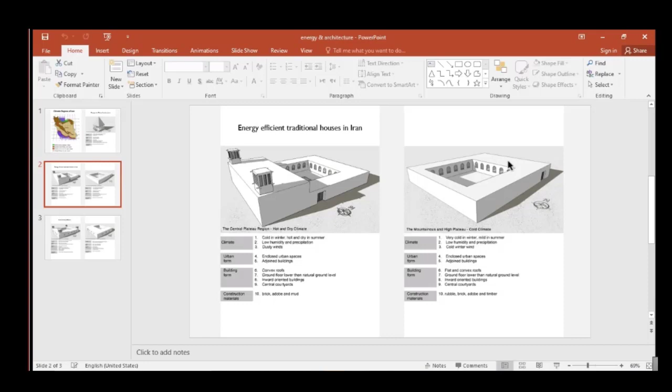this is winter living quarter. Summer living quarter. Summer living quarter is always in shade. Winter living quarter always has access to direct sunlight. Here is warmer in winter. When you go to cold climate, winter living quarter becomes big, summer living quarter becomes small.

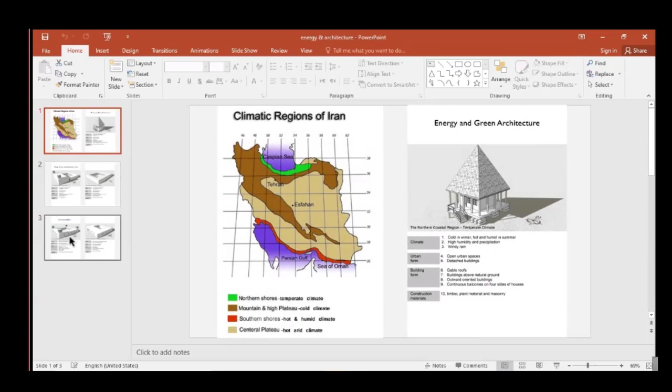When you go to the Persian Gulf and Sea of Oman, hot and humid, you come up with this kind of shape. Cross ventilation becomes important. And in here, which is hot and semi-humid, summer living quarter becomes very important. Winter living quarter is not.

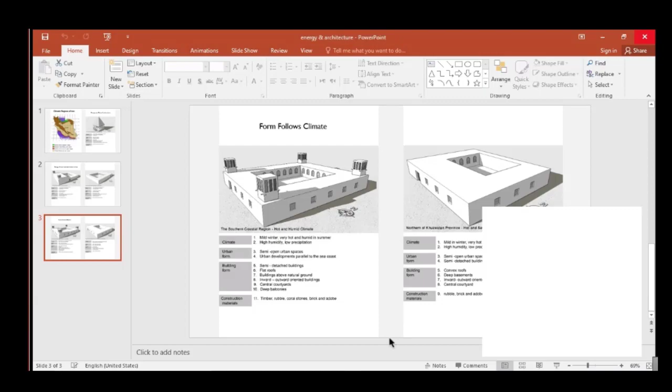So, as a conclusion, what I want to say here is, with minimal resources and material, it would provide support for people to live in. Right now, we have to realize that our planet has limited resources. But they provide protection and comfort for people to live in. Those lessons are for today, for our children in the future.

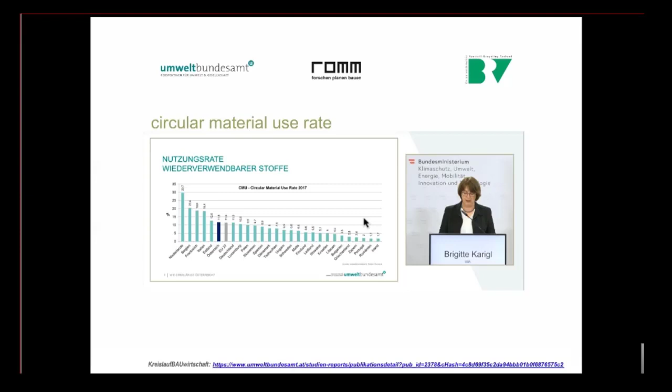So only a small percentage of material is guided in a loop, and this is why we started to look for standards in resource-saving construction, together with the Umweltbundesamt, which is a governmental organization, and the roof organization of building material recycling. And that was before the pandemic came up, at the beginning of February last year, when I presented these figures.

And you have to realize that on the waste side of resources, building construction is responsible for 70% of the waste in Austria. So more than half of all waste is excavation material, which goes to landfill mostly, and still 16% is demolition construction waste. So this enormous amount of more than 30 million tons every year is due to construction.

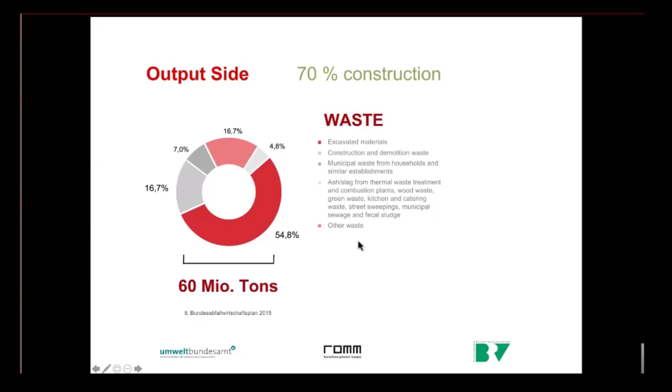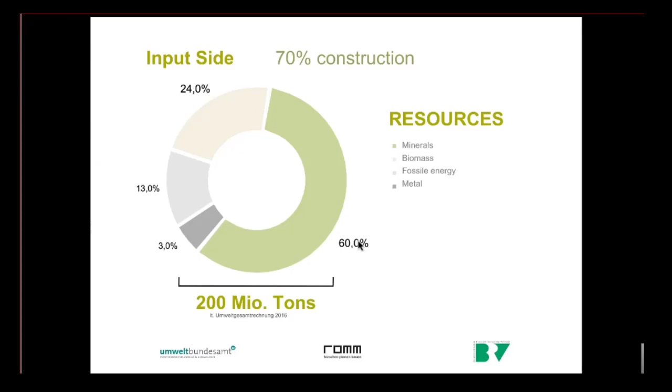But on the resource side, we have an even huger need, because 200 million tons of materials are needed in Austria every year, and again, 70% is needed for construction purposes. So these two figures don't really go together. So even if we close our loops to 100%, we only get 1/3 of the need covered. So 200 million tons are needed and 60 million tons are waste.

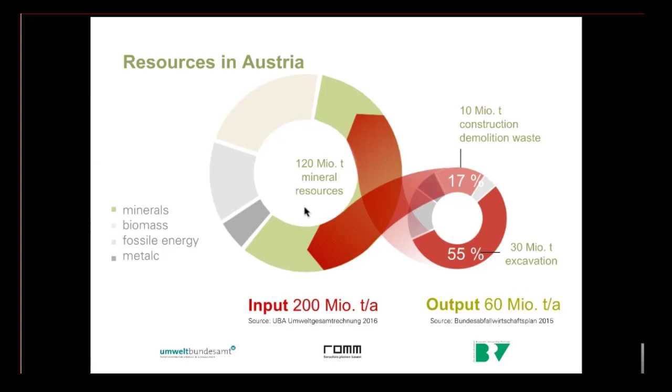And of course, we were looking for a way to bring these two figures together, and the only way for a circular economy in construction is first, of course, to close the loops, but then I agree completely that we have to choose a more durable construction. So it's no more the idea of less is more and being light and so on, but less is more durable. It has 200 years to last. And of course, we have to apply much more renewable resources, as well as renewable energy.

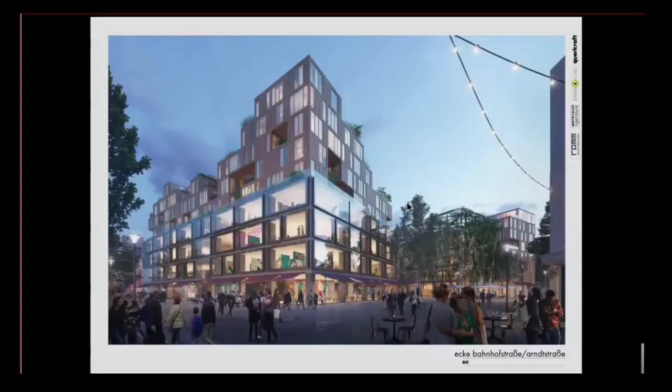So let me give you some examples of our planning practice, where we mostly are consulting other architectural practices all over Europe, and we go through this very quickly, and finally we stay a little longer with the examples of circular construction in terms of construction sites and resource management. So let me show you this competition from last year. It was with Querkraft architects, which are quite famous architects in Vienna and Austria.

And we were invited for an inner city retailer from the 60s, a construction from concrete. And we decided not to tear this existing building down, but to build on top of it and to use the structure. And this was the given existing building, a retail like C&A and Karstadt in Germany.

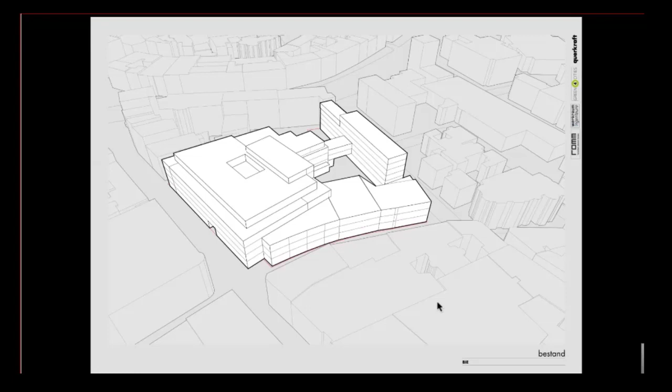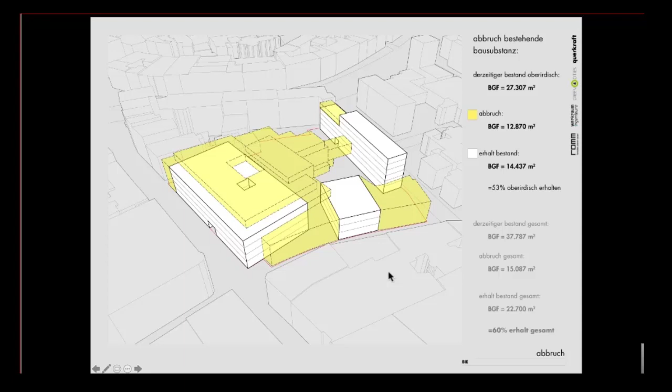This is a site in Bielefeld in northern Germany, where the competition was. And finally, we just took away 40% and we cleared the construction and the structure, and then we decided to keep all the load-bearing structure and to place in new access cores, and finally to put the new architecture as a wooden construction on top of it.

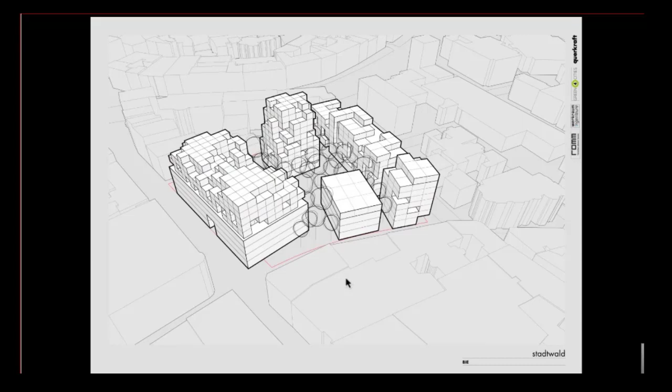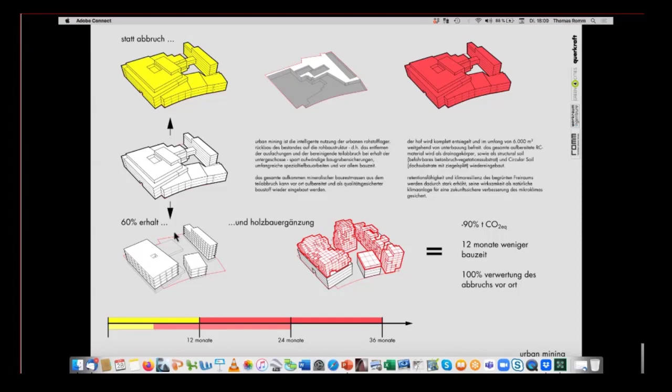So the next step was, of course, to create a climate change adapted structure with much more green on it and in it than it was before. And we did some calculations, and when you compare a demolition and a new building with our procedure, you can save 90% of CO2 emission just by keeping 60% of the structure and by using renewable resources which do not emit any CO2.

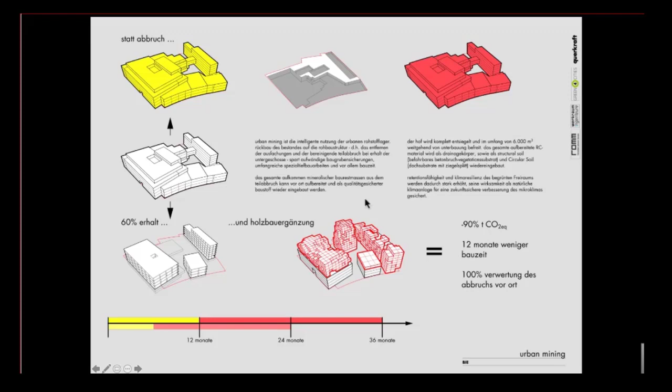And by the way, you are much faster when you choose the second procedure, because the demolition work is much shorter and you build up on a structure which is half given, so even the construction phase is shorter, and this is why it's also an additional advantage. It looks nice.

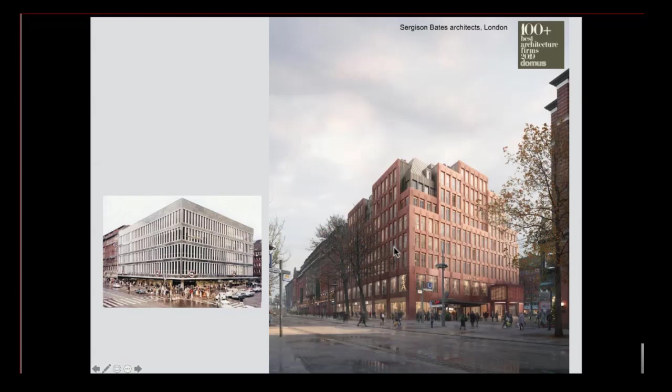Another example, a competition that we have won this year with the London office in London, was also a retail object, an inner city retailer which was built in the 60s, but in that case it was impossible to use the structure because of asbestos, and it was highly contaminated. So we had to choose. We could not use the existing structures, so we were thinking about a low-tech application for a hotel on top

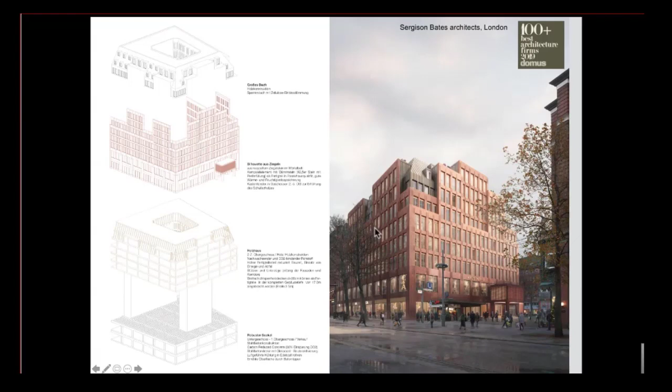of a retail store, and the solution was to choose not an insulated building, but a building completely out of brick, which was cladding a wooden structure like a big ship, a solid construction of wood placed on a base of concrete. So clear separation of materials and resources was the concept, and the cooling and ventilation of the building was meant to be, as you see on the left-hand side, a concrete core cooling system.

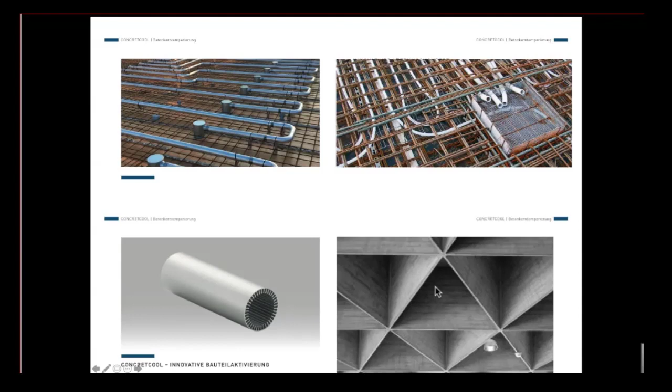So you're cooling the building by its thermal mass and using its construction materials to cool down the ventilation air, which is tempered by the mass of the concrete itself, and that was the idea. And just 1 year before that, in 2019, we could not win this competition, but it was the first one where we used that concept of building thermal mass to heat, to store and to cool energy, and it was a double application in a way.

The submission had to include a version where we kept half of the existing building, which of course we did prefer, and this is the yellow one. So in the direct comparison, the same idea was to use the thermal mass of the concrete construction inside with building component cooling, the activation of the concrete slabs, and to have a monolithic facade which is not insulated but purely made out of brick.

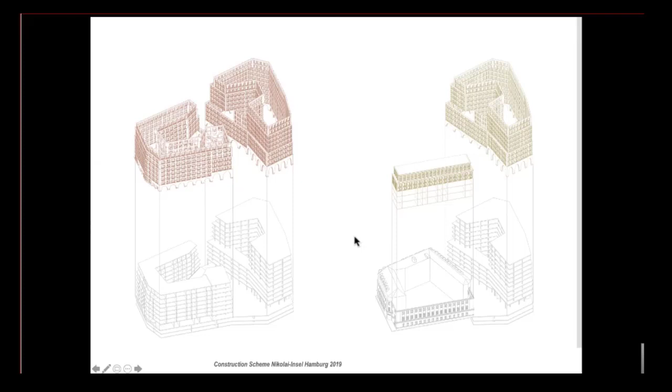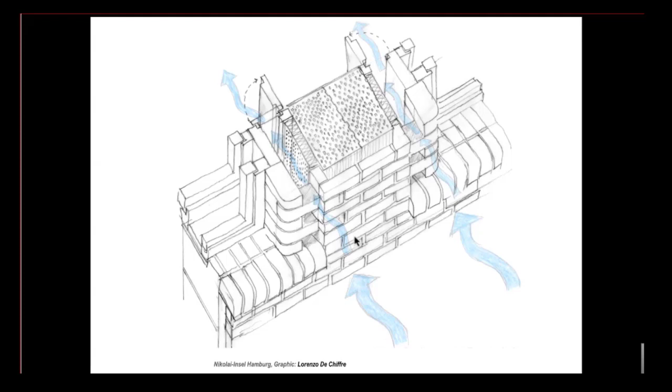And this is actually referring to a very famous scheme where only ventilation is regulated to cool the building, and the insulation of the thick brick wall is enough to have a good energy performance. This principle was invented by Baumschlager Eberle, the famous architects who also built the airport in Vienna, and it is called 2226. I may switch now to the website, which is explaining this concept, because it's really important. It's a really interesting low-tech concept.

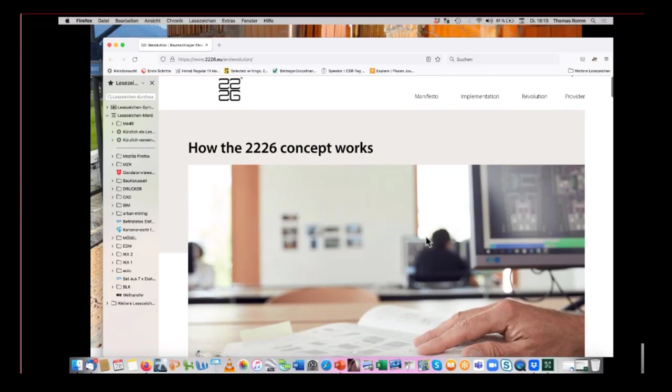2226 is actually addressing the temperature where we are comfortable. So it's the comfort zone between 22 and 26 degrees, which is the gray bar in this graphic. And the blue graph is the outside temperature, which might range in a year between -10, -15 even in Austria, and at the moment it's over 30 degrees in summer.

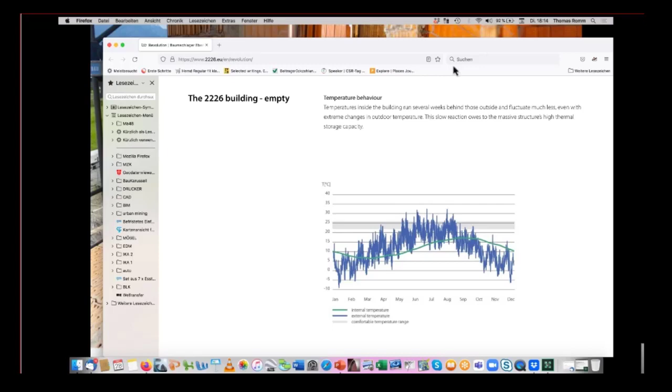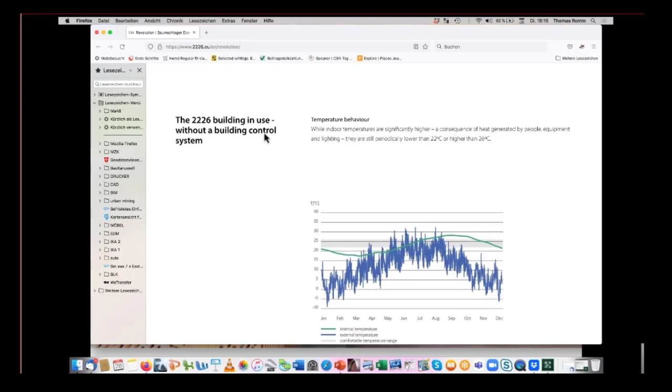So you have this wide range of temperature, but when you use a 70 centimeter brick wall, as you can see in the picture, the building performance is not so bad, and the temperature ranges between 5 and 15 degrees, which of course is not so comfortable. But as soon as you start to use the building, you put in your computers, machines, electric light, and also people who work in this building, you see that the range is much closer to the comfort range of 22-26. So the usage of the building is the actual heating.

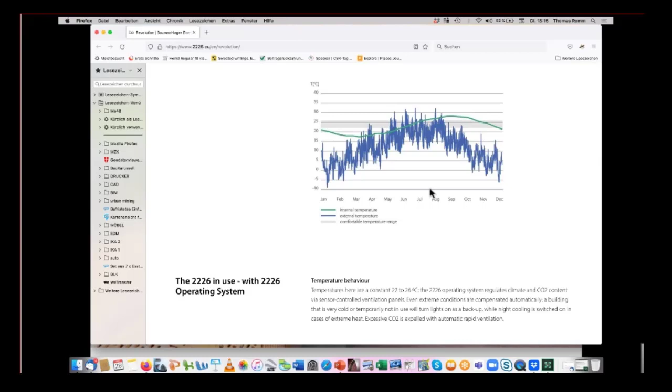And over 26 degrees is not in the comfort zone. This is why this building is also operated, as you have seen, by ventilation flaps which are opened at night, and of course, as Vahid said, the cross ventilation of the building is the key for good thermal performance.

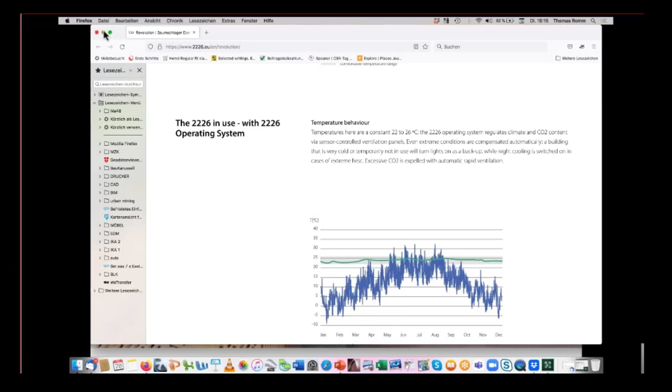So 2226 is, from our point of view, a very good low-tech approach in Austria, where you have to cope with heat and also with low temperatures.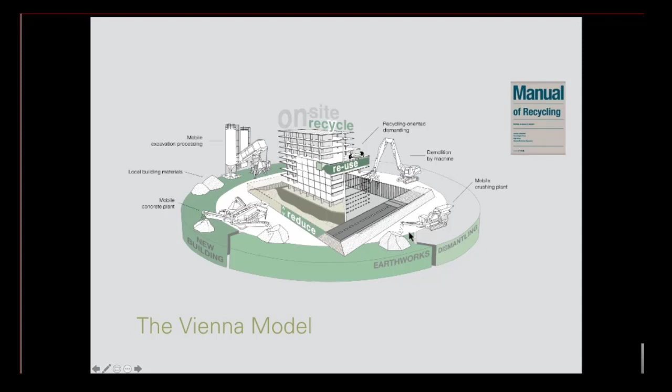Let me skip now to our practice on sites. We have recently published the manual of recycling, even in English, featuring the Vienna model, which is a kind of summarized work of the last 10 years, where we have tried to use local resources to build with, and point this out.

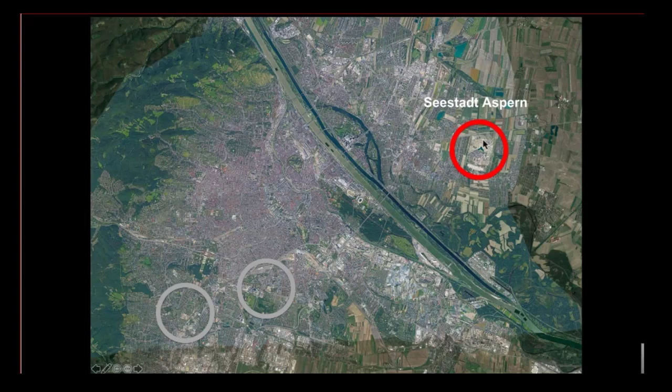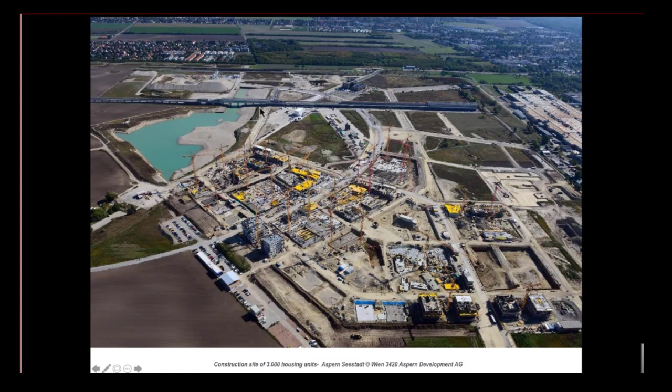Now let's start with Seestadt Aspern, one of the hugest urban development areas in Vienna. You see how huge it is, and 3,000 housing units were entirely built with the gravel and sand of this little lake and of the excavation material itself, so there was no waste of excavation, and all has been processed to produce concrete on site.

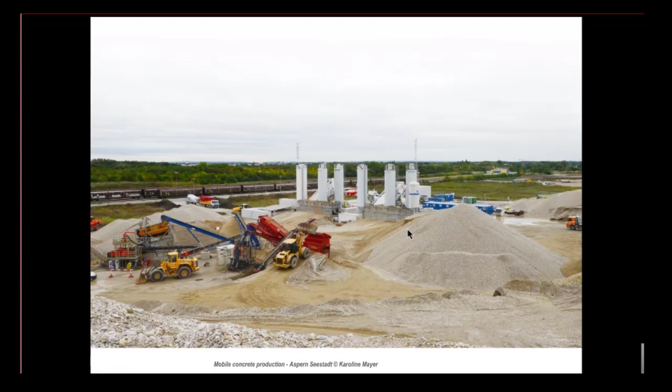Finally, we succeeded in building 3,000 housing units with the material on site. And of course, it was the first mobile concrete unit which had to do such a big job. Normally we build tunnels with that type of technology, but in that case it's perfectly suited also for housing.

Pardon me? Can I continue? Can you hear me? Hello? Okay, so I go on. Sorry.

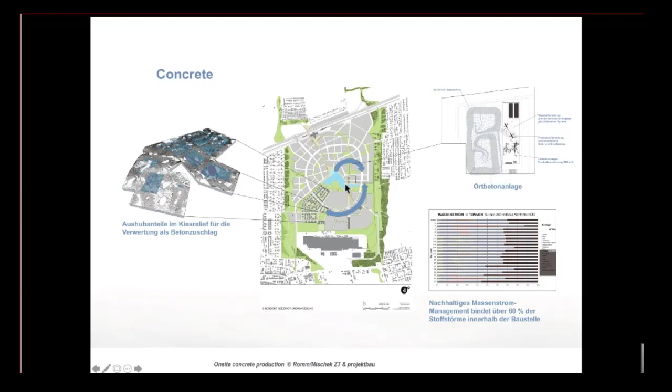So this is just a graphic showing how the location would be. Our planning process was actually to use the excavated sand and gravel and to process it on the logistics side here. Finally, we could manage to use up to 60% of all building material needed out of these local materials.

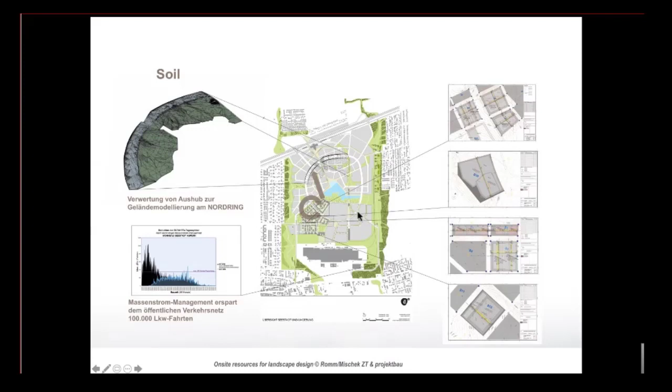But the second finding was that we could also use the covering, the upper soil, for the usage of landscape design. And this was a finding that we applied to the Wildgarten, a second urban development area in Vienna, where we used this knowledge from the upper soil, because there was very little building material in the ground, and this is the analytic scheme.

So near the Danube you have all this sand and gravel, of course, but far away in the south of Vienna you will mainly find heterogeneous building material. The soil, which takes 500 years for nature to grow just 2 centimeters, is the waste which goes to the landfill when you start to build.

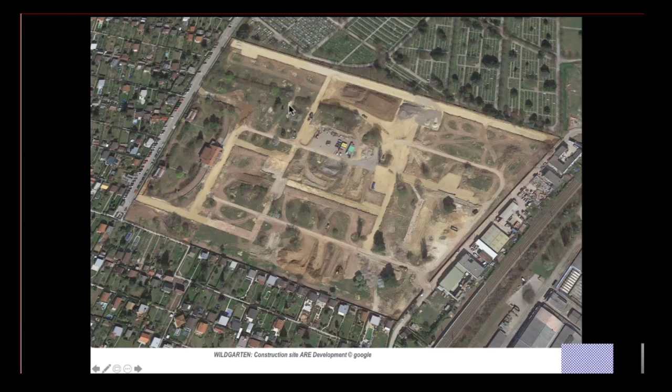As you can see here, not a single construction housing site has yet begun, and just infrastructure is placed, and all of it is gone. So this is how it looks like.

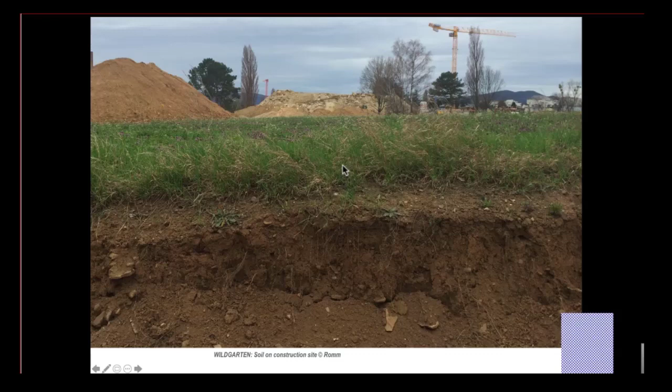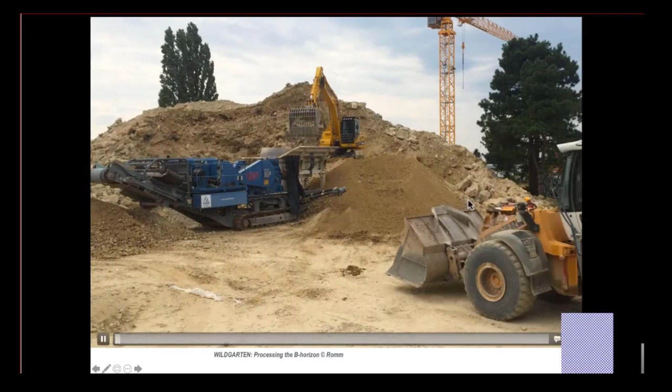So this was really a fertile and important resource which should not be thrown away and should be kept. This was the first time we tried storing the whole soil next to the site on the ground. We were renting, and even paying a certain fee, which is more attractive and more cost efficient than taking it to landfill.

And this is our processing of the so-called B horizon, which you need as a component. So again, local material, but in that case for a vegetation substrate purpose, has been processed and could be used entirely.

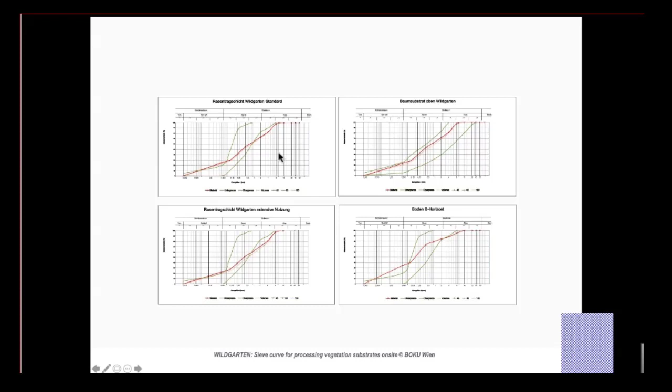Recently, one of my team members found out that even Otto Wagner applied these techniques to use local materials for local building purposes. In this competition in 1914, more than 100 years ago, he emphasized that all materials, or the biggest part of materials, could be gained on site.

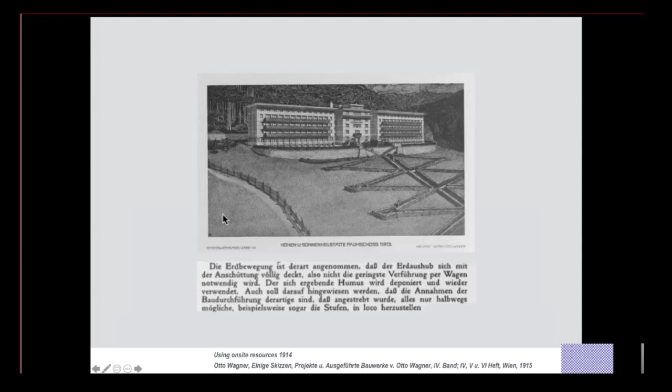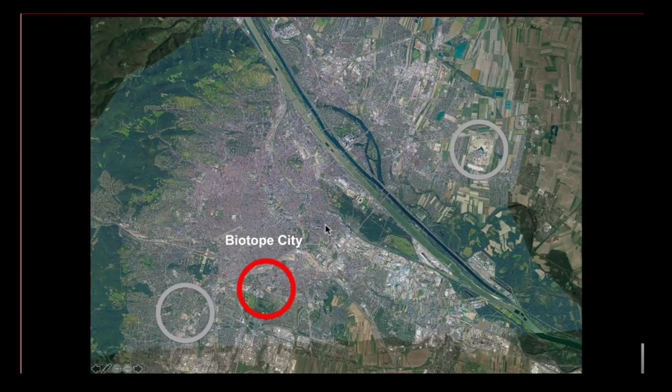And this is the last project I'm talking to you about now: the biotope city, an ambitious project with the idea of putting more green on buildings and on housing, but actually it was a facility, an industrial facility on a brownfield. This was our first urban mining site, where we succeeded in receiving more than 60,000 tons of materials for building purposes.

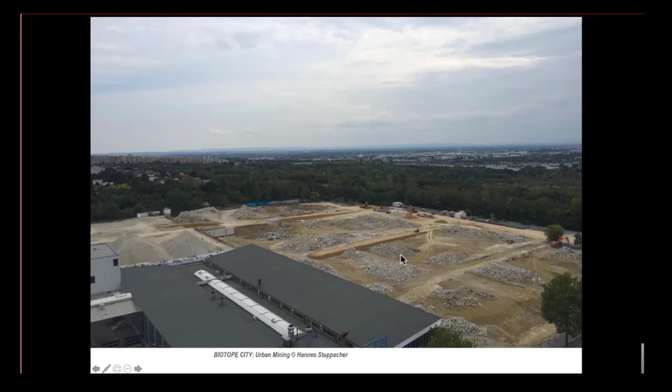Construction demolition waste is an important resource, and we processed it on site. The comparison with an on-site facility versus a stationary facility makes it obvious you have to process on site: 30,000 tons of construction and demolition materials takes 6,000 liters of diesel on site, but when you take it away and bring it back to process in a stationary facility, you have to invest 55,000 liters of diesel. So on-site processing of materials is the very best solution.

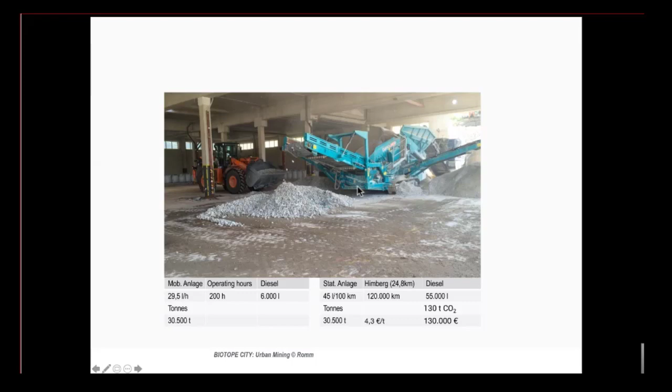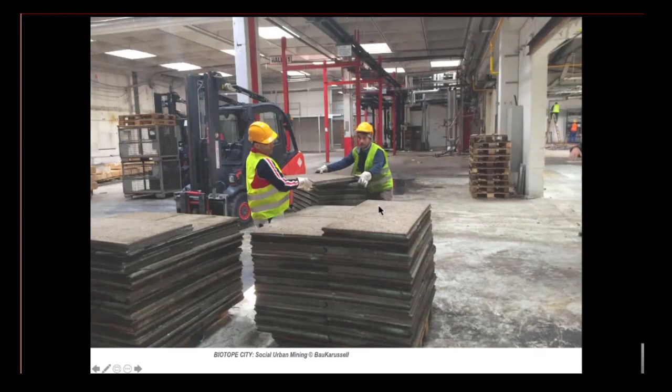So we founded Baukarussell as a social enterprise to reuse, recollect and sort building components for reuse on site. This is even better than recycling, because insulation panels from the roof were used to insulate garages and everything else being built. We founded this business model by first collecting the copper with Baukarussell to get the work paid—not by selling the insulation panels, but by selling the copper. This previous collecting of copper turned out to be a good business model.

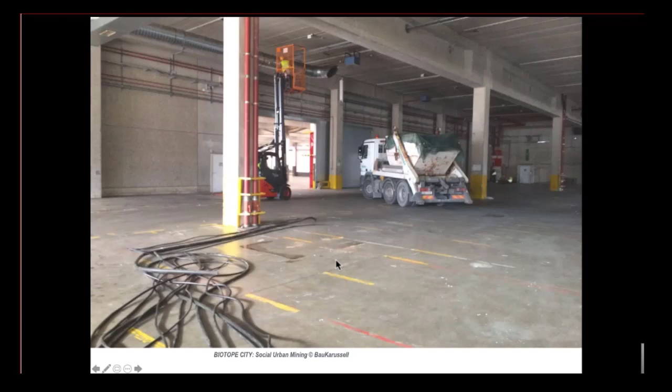So Baukarussell, as a social urban mining enterprise, uses building components like copper and reusable building elements to generate revenue, creating a budget for jobs, which is then applied to the dismantling work of buildings.